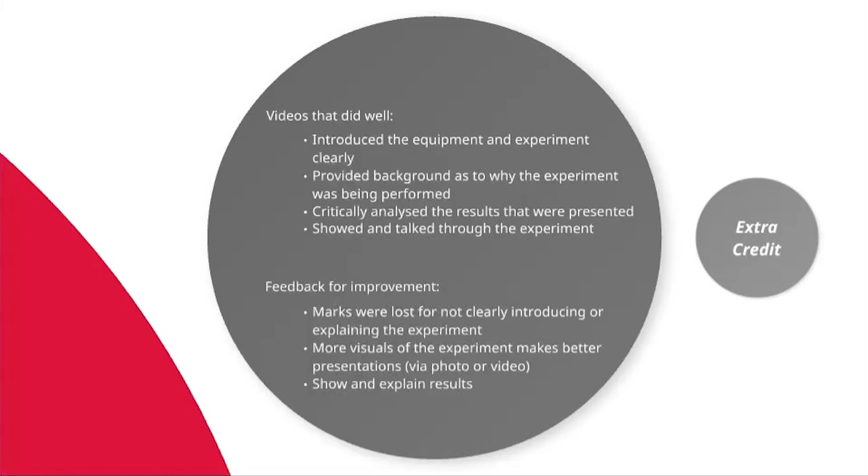Feedback for improvement. Marks were lost for not clearly introducing or explaining the experiment. We needed more visual emphasis on what the experiment was, so whether a photo or a video, as this makes a better presentation. Show and clearly explain your results. Show graphs and calculations, then explain what this shows.

We also want to have a shout out to the teams who provided a post-lab overview of how to clean out the equipment after the experiment ended. This was a nice extra. Included real-world examples, provided diagrams of what the experiment looks like inside to help explain the experiment procedure, provided relevant theory and linked this to results. By doing this is how you get high marks.

On a fun note, we also wanted to commend the team that had renamed the equipment used after introducing it formally.

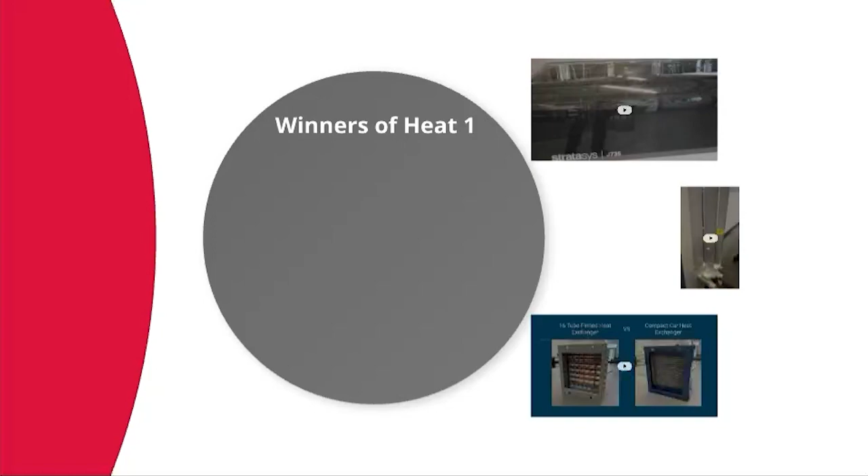Now, onto the results and what everyone has been waiting for. So, from each institution's videos were judged in round 1. And the one winner from each institution was then put forward into the final. So from the 3 universities, the winners of each are...

Hello everyone, my name is Sheikh Benisi. And I'm Jim Sanosavo, and we're both mechanical engineers here at SUNY New Paltz. We're just some of the individuals who get to work with the TecQuipment wind tunnel demonstrator. Although, here at SUNY New Paltz, we like to call her Betty for short.

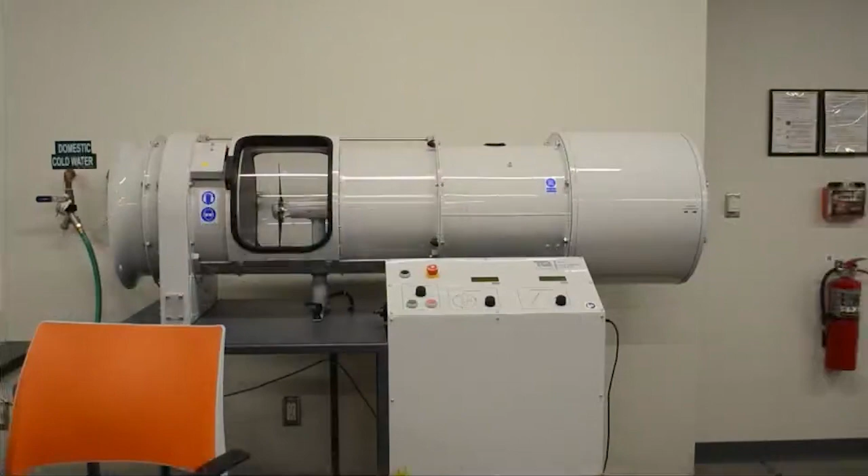Betty is a small-scale wind tunnel featuring a 3-bladed wind turbine, and it's capable of drawing more than 15.5 meters per second of air. She has an adjustable lever that controls the yaw of the blades, as well as a variable pitch dial that is accessible on the front panel interface. This panel also features controls for the fan speed in Hertz, as well as turbine speed in RPM.

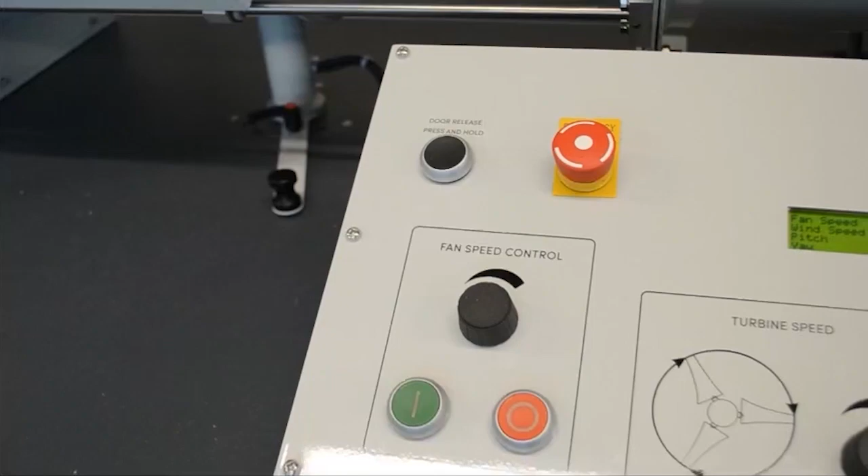Additionally, Betty can also send data to our provided computer software, VDAS. The VDAS software can record all input parameters like yaw angle, pitch angle, RPM, and fan speeds. However, the primary output measurements are power and torque. See that red thing in there in the corner? That's the anemometer. It can be used to measure the wind speeds across the diameter of its opening, to get the incoming airspeed, also known as its velocity profile.

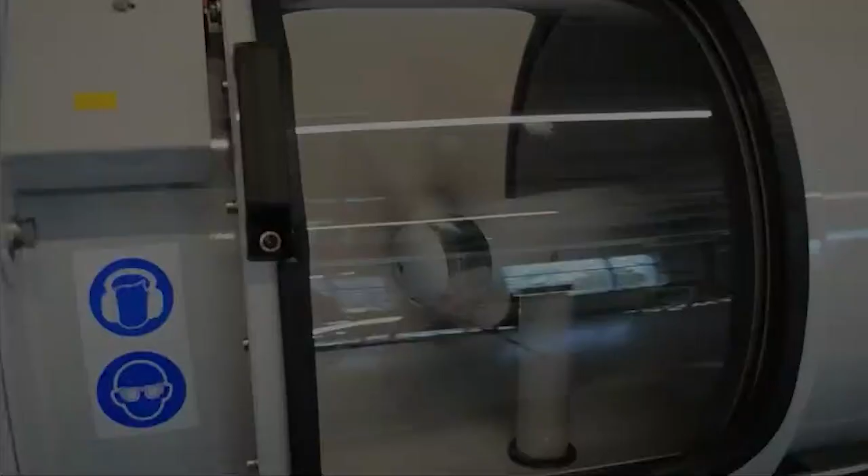Our research specifically focuses on the compatibility of making 3D printed turbine blades for use within the demonstrator itself. Basically what we did was we replicated the blades that were provided for us by the company and 3D printed our own. This here is the HVAMC, also known as the Hudson Valley Additive Manufacturing Center. Using this campus resource, we were able to fabricate our current and any of our future blade designs.

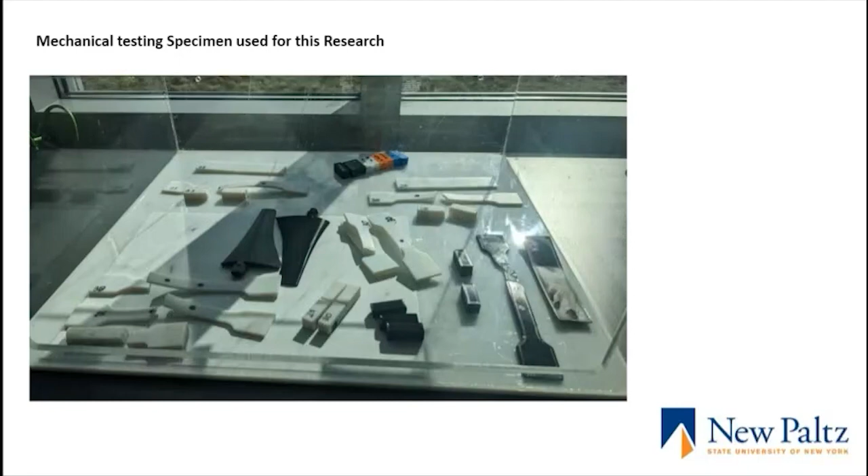This thing right here is the PolyJet. Using this machine, we're capable of printing objects comprised of different materials at varying ratios. In order to ensure that the blades we fabricate meet the safety requirements laid out by TecQuipment, we perform material testing in the form of tensile, flexural, and impact tests on several materials available through the HVAMC.

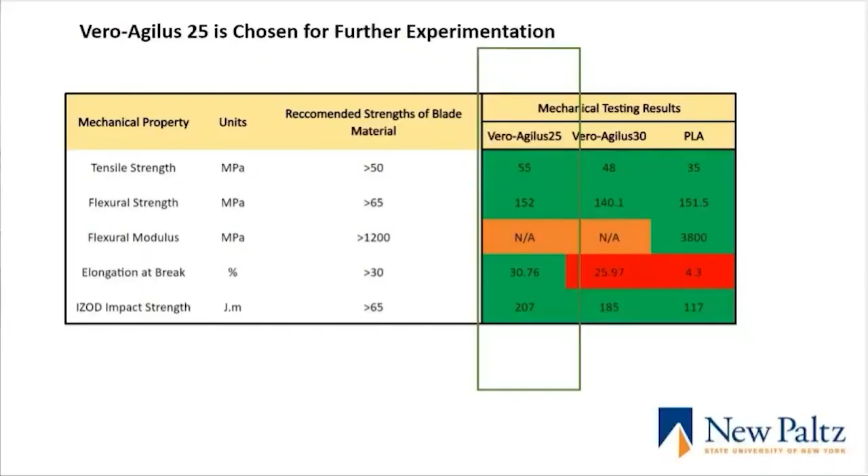The results of the tests show that the blend Vero-Agilus 25 is the strongest of the chosen materials. These meet the requirements laid out by TecQuipment for use within the demonstrator, so we decided to use this material for all custom blade models from here on out.

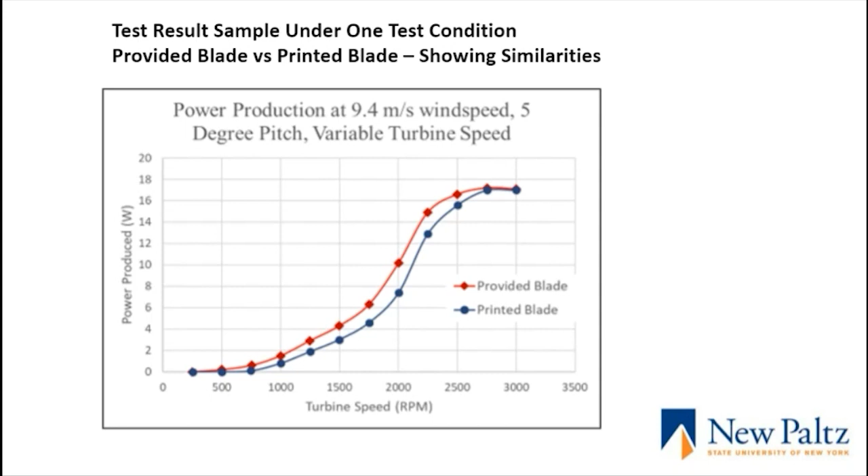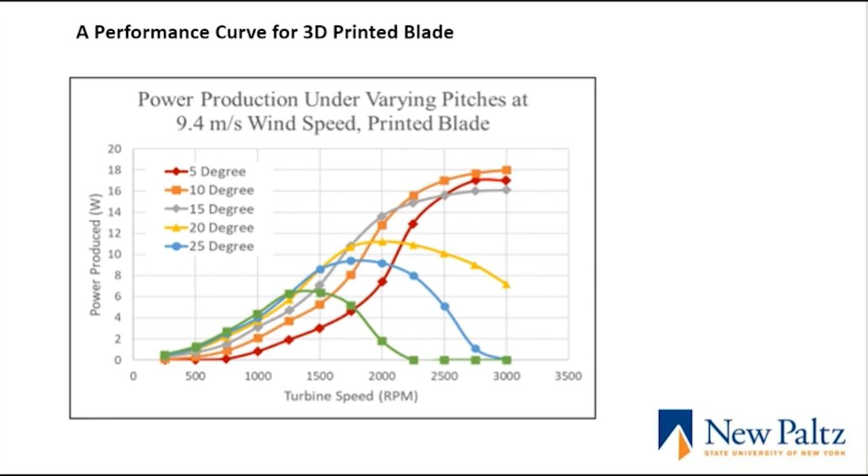Here is one example of a performance curve generated for our printed turbine. This graph shows the power output under a constant wind speed of 9.4 meters per second. Each curve represents one pitch angle. The y-axis shows the power output and the x-axis shows the turbine speed. This testing can be performed at multiple wind speeds to understand the turbine's performance under any combination of input conditions.

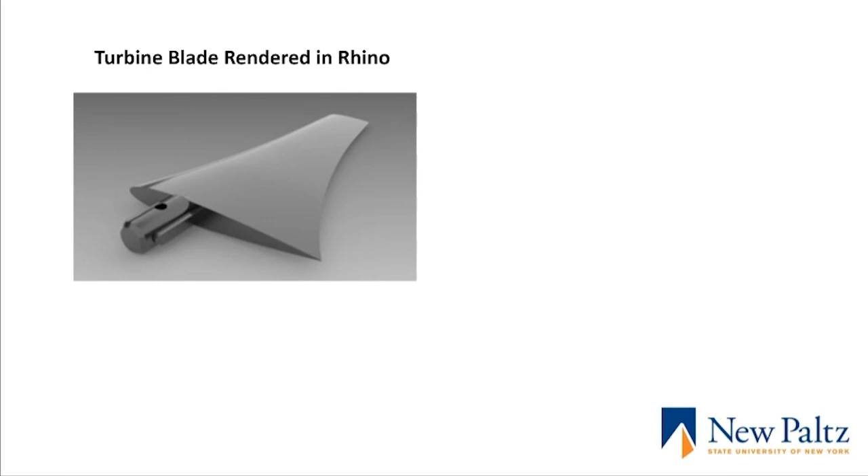Drawing from our experience with 3D modeling softwares like Rhino 3D and SolidWorks, we intend on creating wind turbine blades comprised of multiple different NACA airfoil cross-sections.

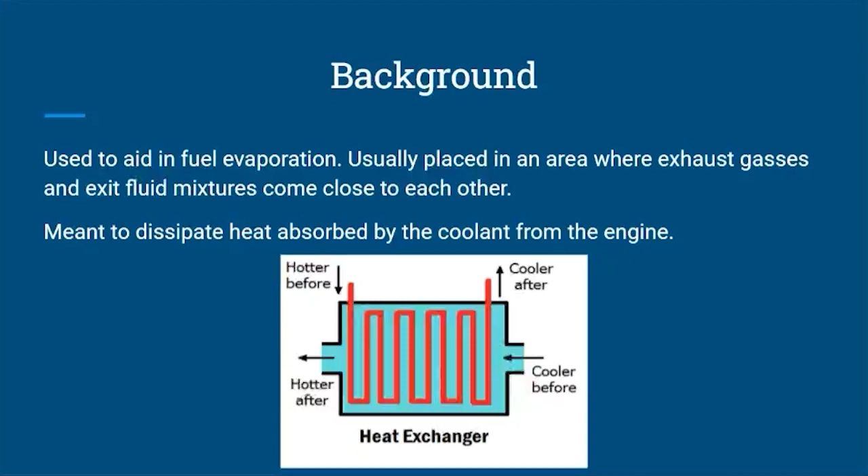We'll be analyzing two different heat exchangers. Heat exchangers are used to cool down coolant that has been heated from the engine. The coolant will travel through tubes and get cooled down by the air, then sent back through the engine to prevent it from overheating.

Our proposed research question is: how does the overall efficiency improve when varying airflow rate of an automotive compact heat exchanger versus a 16 tube finned experimental heat exchanger?

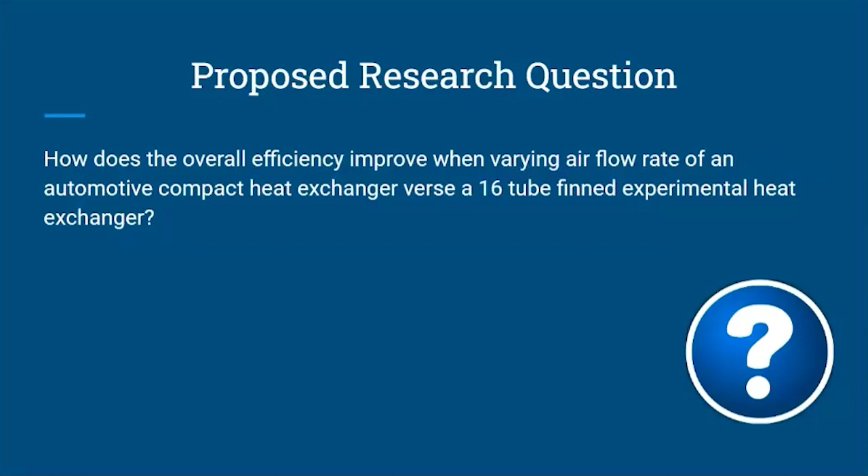Here's the machine used to test these heat exchangers. It is called the TQ-TD1007 water to air heat exchanger.

To set up this machine, we first place the heat exchanger in the middle between these two steel frames, then clamp it down using these clamps. Then we'll connect the pipes - the bottom one is the water supply, and the top one is the water return. After that, we'll plug in our communication, which will relay information to our computer that will be collecting our data.

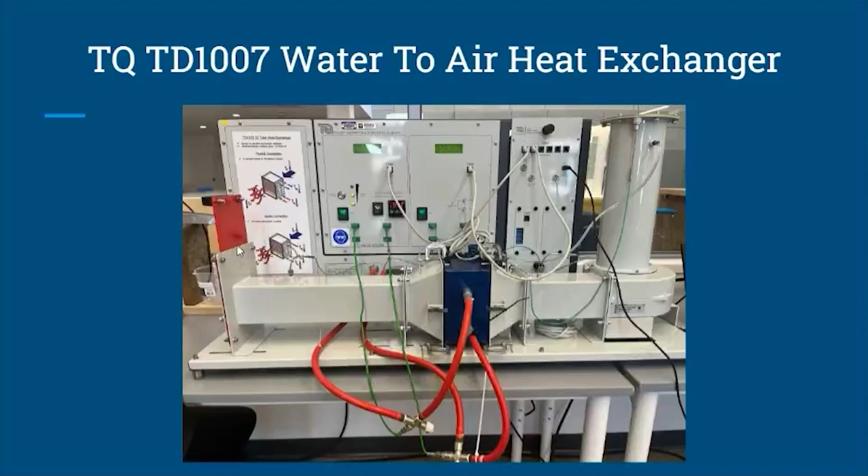After that, the machine is ready to be powered up, and here is where we'll set our temperature, then turn on our fan and water. Here's a valve that will adjust the liters per minute for the water rate, and here's a sliding gate which will adjust the outlet pressure.

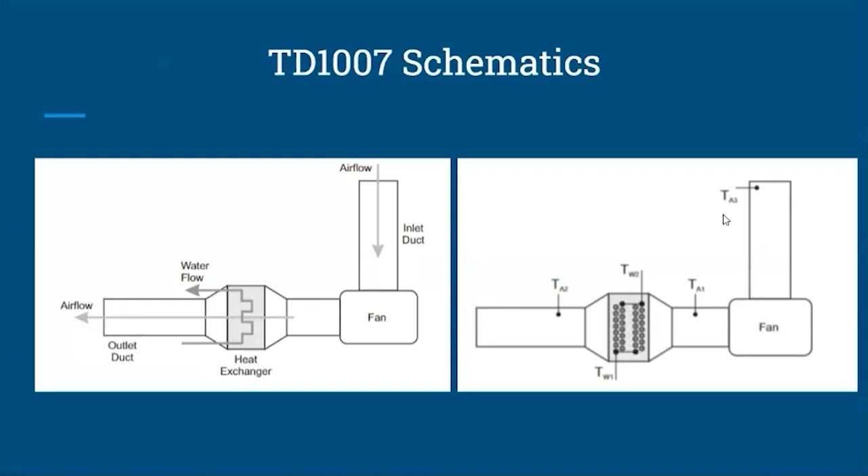Here are the schematics for how the air travels through the machine. This is the inlet, and it'll blow over the fan, which will push it through the heat exchanger and out the outlet. Over here is where we'll be measuring the points on the machine for temperature - the TAs are all the air temperatures, and the TWs are where we'll measure the water temperature. Here's our heat exchangers used for this comparison.

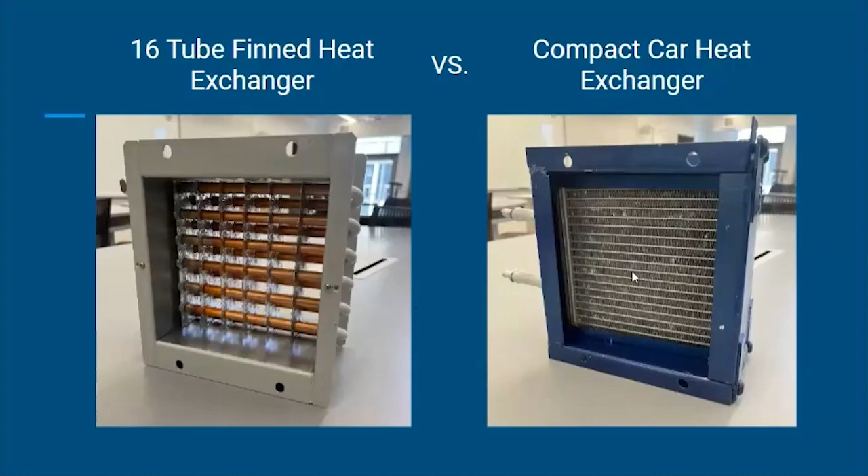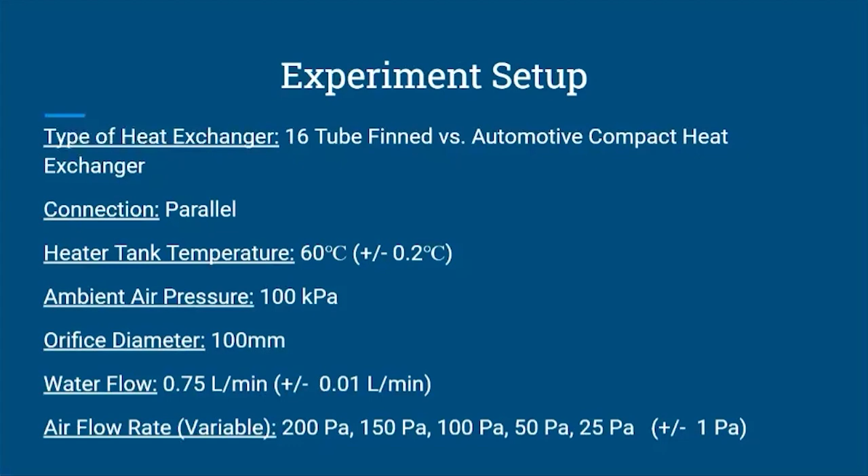The experimental setup: we have two types of heat exchangers as explained. The connection can be set into parallel or series, and we used parallel. The heater tank temperature is 60 degrees Celsius, ambient air pressure is 100, orifice diameter is 100 millimeters, water flow is 0.75 liters per minute, and our airflow rate, the variable for this experiment, goes from 200 to 150 to 100 to 50 to 25.

And here's a demonstration of our experiment.

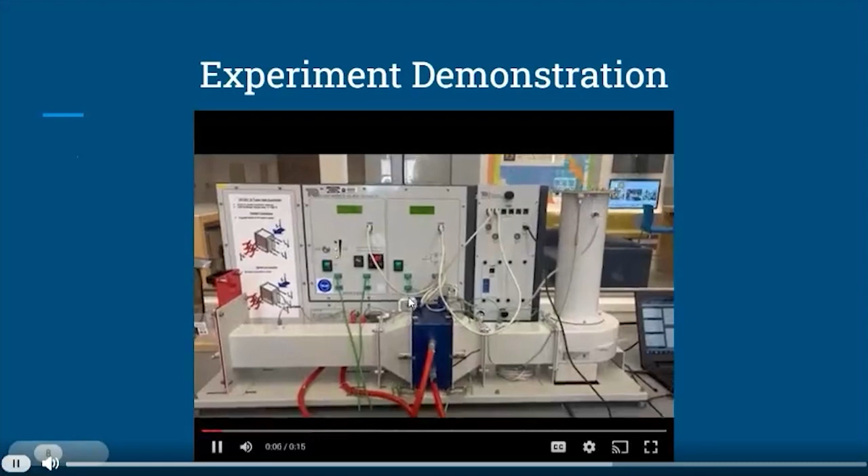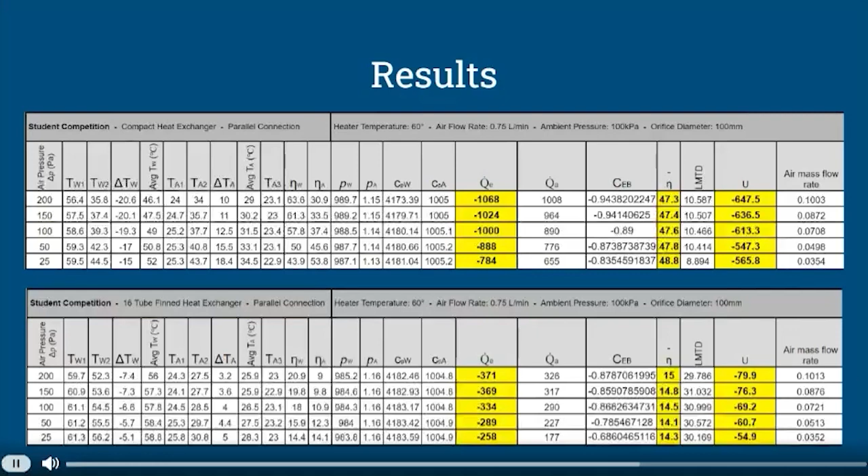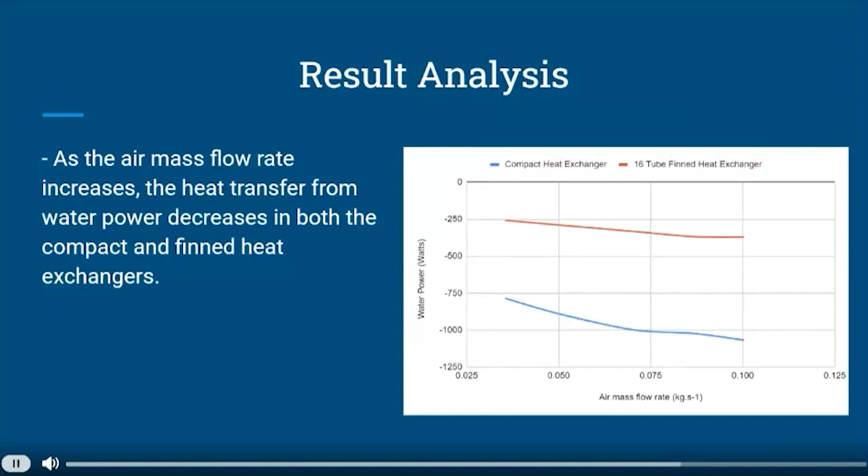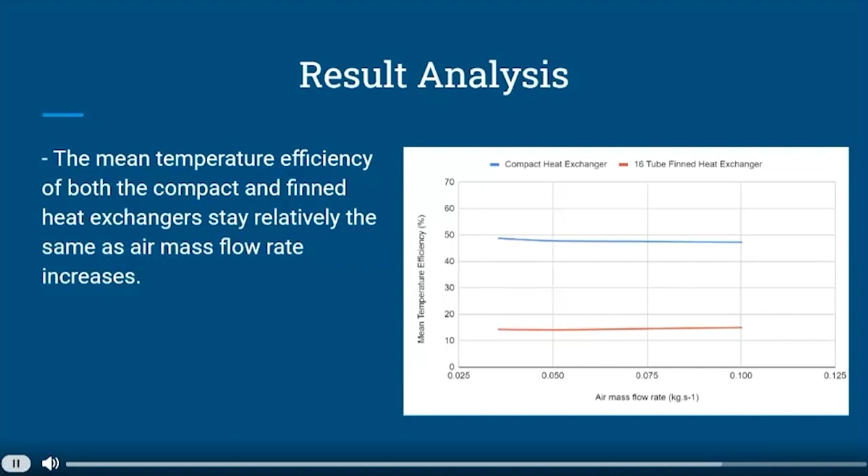In this graph, we are comparing the mean temperature efficiency to air mass flow rate. We can see that the compact heat exchanger with increased surface area is much more efficient at transferring heat than the finned heat exchanger with less surface area, with both heat exchangers' temperature efficiency staying fairly constant as the air mass flow rate increases.

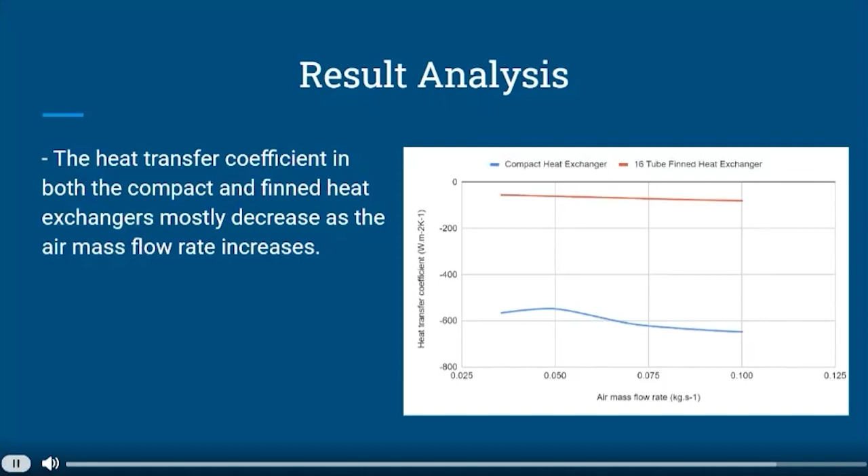As we can see, the compact heat exchanger outperformed the finned heat exchanger by every metric. This outcome was expected because the compact heat exchanger is a real heat exchanger, and we are comparing it to one meant more for a lab setting. But we did not know the compact heat exchanger would perform better by such a large margin. Overall, from this competition, we can now see the connections between how an experimental heat exchanger compares to a real-life application of a heat exchanger.

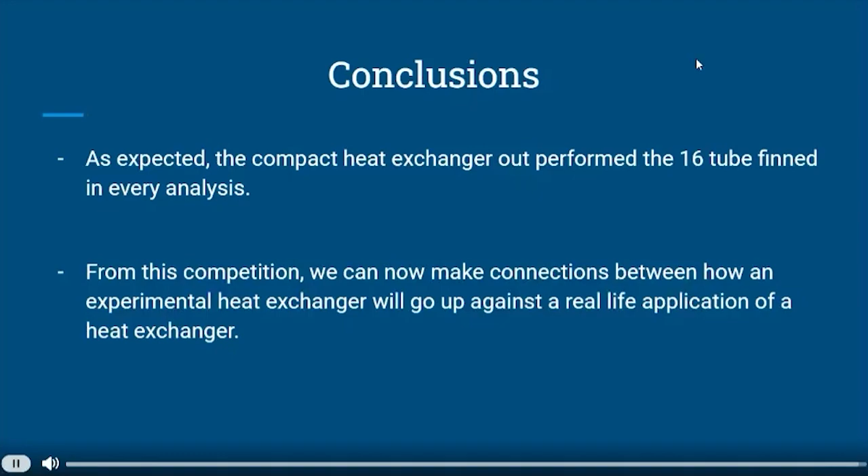So from these three teams, who will be our grand final winner? Drumroll please. And the winner of TecQuipment's 2023 student competition is the University of Michigan Flint Team 3, Analyzing Heat Exchangers. Congratulations to Braden, Carson, and Colin.

The winners presented a well thought out and interesting comparison of heat exchangers with in-depth coverage of experiment background and overview, and demonstrated the equipment and provided results that they then drew appropriate conclusions and critically analysed their work.